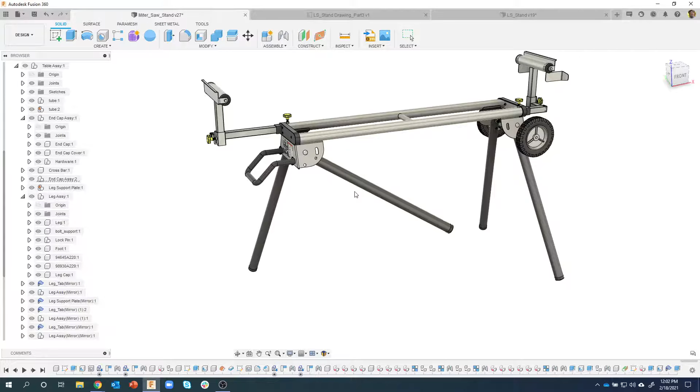We're going to continue today through using the miter saw stand that we've been working on. We're going to be working on this leg assembly, specifically the whole leg. If I zoom up in here, you'll see we've got some hardware - a pin that goes through here with a spring, etc. And then we're also going to work on this slot. The last live stream on this series, we created this sheet metal part, but we left out this slot, so we're going to show you some cool tips and tricks on how to do that.

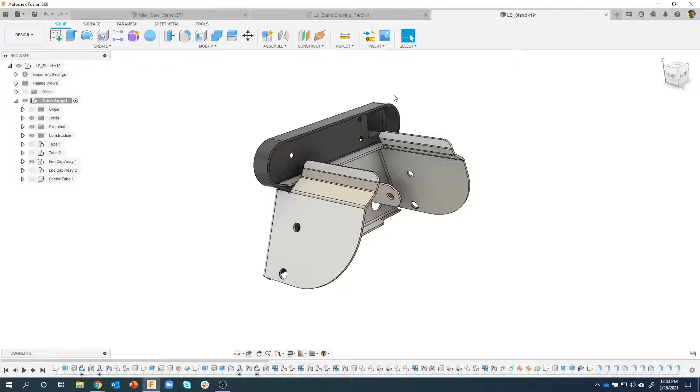We're going to basically be creating one of the legs, and then we're going to reuse that leg around the rest of the design. So I'm going to start out by creating a new component. I've shown in the past you can come into the assemble menu and say new component, or click on this icon and say new component. But my favorite thing to do is to right mouse click in my structure browser where I want that component to be. So I want it to be underneath this table assembly, so I'm going to right click and say new component.

You can't really see what's going on, but this parent says one selected, so it knows that the table assembly is going to be the parent, and this component is going to go underneath that. So I'm just going to call it leg. Pretty unoriginal. Okay.

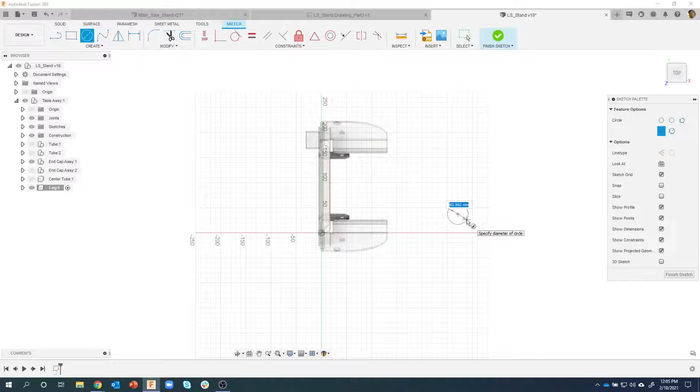We'll create a sketch. In this design, I'm actually creating things out in space and then positioning them into the correct location later. So I just created a new sketch on the top plane. I'll create a circle out here somewhere - doesn't really matter where - and let's just do 45 millimeters. Again, this is according to the drawing.

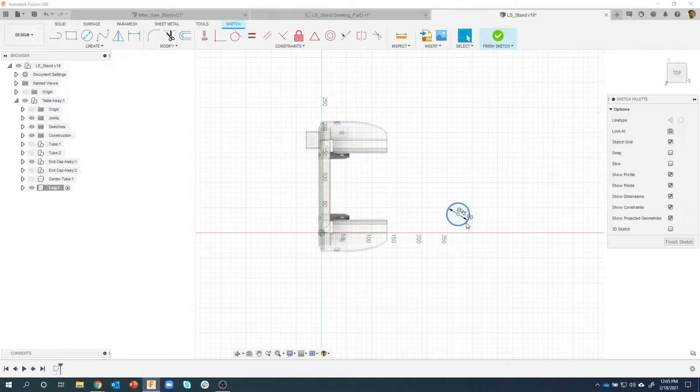Okay, so it's a 45 millimeter diameter. Then I'm just going to extrude this, and I've shown this tip before - I could say finish sketch, but if I just click on my profile and right mouse click, I'm going to do this first extrude. The second extrude is a surface extrude, so you typically don't want to do that. So I'm going to do this first extrude, and you'll notice it finishes my sketch for me, so I don't have to click on finish sketch and then click on extrude. And we'll go minus 820 millimeters according to the drawing.

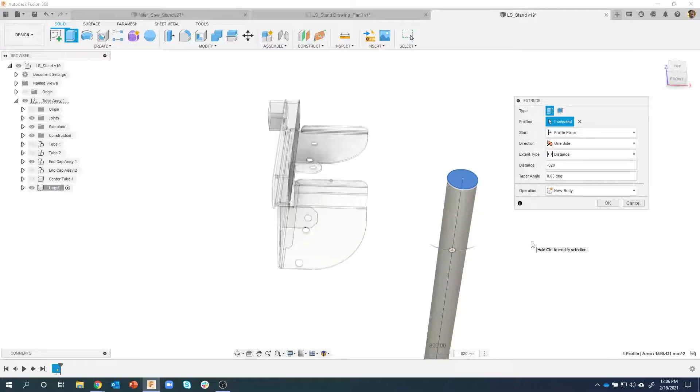Now, we recently added this thin extrude, which I really like. So instead of having to shell this part out or create multiple circles in my profile, I can come in here and say I want to do a thin extrude, and it's going to ask for the wall thickness. In this case, we're going to do 2 millimeters. And when I say OK, it's like it shelled it out for me automatically, and I didn't have to select the top face and the bottom face if I had used the shell command. Cool little tip.

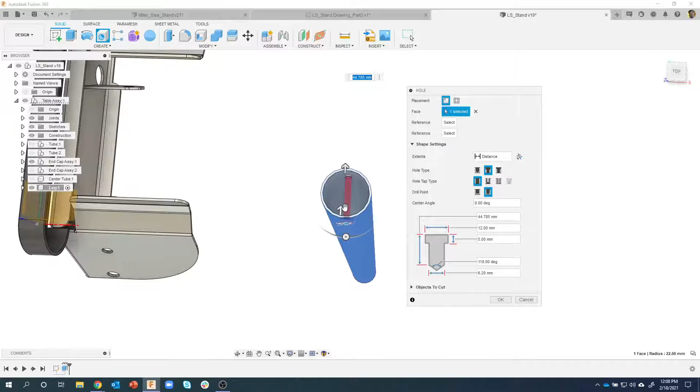Now if I were to have clicked off to the side a little bit more, over here, you'll see it's going to go tangential 90 degrees from that direction. So I don't even have to create an offset plane or anything like that. It just does it automatically, which I think is pretty cool.

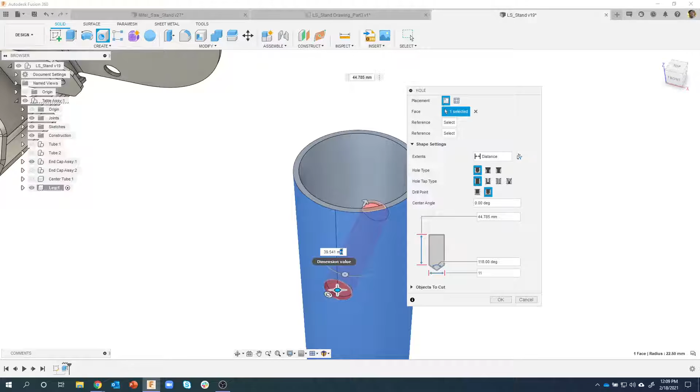Okay, so I'm going to click somewhere on that face. The diameter of this top hole is going to be 11 millimeters. I'm going to reference this top face, and as I hover over it, it highlights. I'll click on that, and it throws a dimension there, basically saying the center of this hole is going to be this distance from that top face. I want it to be 15 millimeters, so I'll type in 15, and you'll see that updates and moves that hole to be 15 millimeters from the top face.

The other thing I want to do is, instead of a distance, say go through all. Did you see that change ever so slightly? Notice when distance was set, it wants to do an angled drill—let me look at it from the side. It just picked some random distance. But if I say go through all, it goes all the way through. The drill point really doesn't matter in this case. I'll go ahead and say OK.

Okay, I'm going to create the other hole. That was the 11 millimeter diameter hole. Now I'm going to do this 12 diameter and 6.2 diameter hole, all with the same command. I'll just right click and drag straight up to repeat my last command. If I right mouse click, you'll see this black line—that's called a gesture. If I right click and drag up, it repeats the last command, which in this case was the hole command. If it was an extrude, it would repeat the extrude command, or a circle command, whatever your last command was.

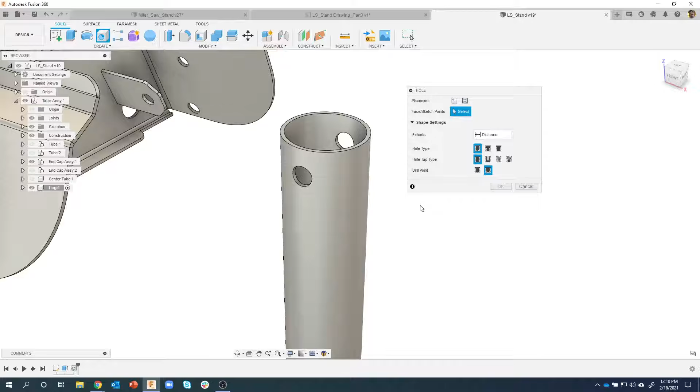Okay, so I'm going to click on this face again somewhere. I'll reference that top face, and this needs to be 71 millimeters down, so we can see that preview. Now, what I want to do is have a larger hole in the front and a smaller hole in the back for this little spring pin to go through.

I could do this with two separate hole commands, or I could change to this counterbore, which will allow me to give a diameter here and a diameter here. For the through hole, I want that to be 6.2 millimeters, and you can see how the preview updated—that got smaller. And let me go here: this one is going to be 12, so that was actually correct.

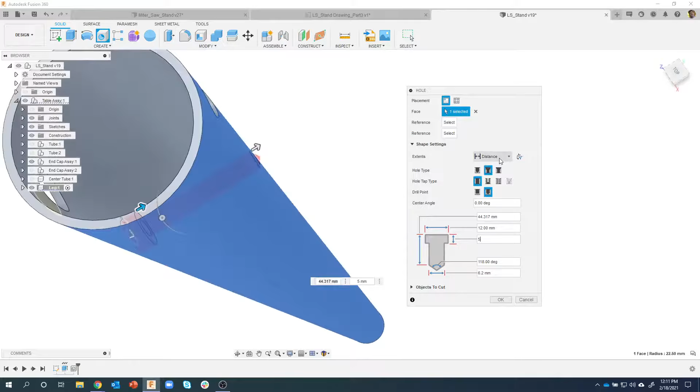And then for the depth, I just need to make sure I'm going deep enough that it's cutting through the wall. You can see right here it's set to 5. I could set it to anything really, it doesn't matter—I just want to make sure it's cutting through that wall. Once again, I'm going to say go through all, that way it goes all the way through.

It kind of rotates funny because that's such a long part. But now you can see we're going to have a larger hole here and a smaller hole through the back. So I'm going to go ahead and say OK, and there we go.

Okay, so Ayal asked a question: can you ask Brad to show what does the rotation handle on that hole do?

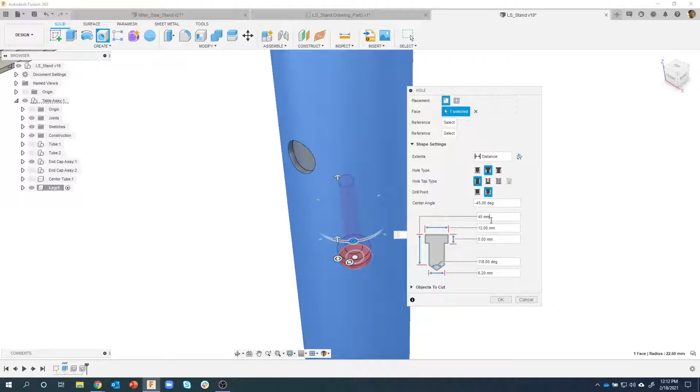So the question was, if I were to create a hole here, it's kind of hard to see, it's kind of buried in here right now, but this actually allows you to—by default it starts at that tangential face, or zero degrees of angularity. I could come in here and rotate it to whatever I want. In fact, I could say I want that to be at 45 degrees—sorry, that was the wrong one—45 degrees right here. So yeah, great question, thanks for asking that.

Okay, moving forward. So I now kind of have the pipe the way it's supposed to look. But in the actual pipe, there is an insert that the bolt goes through. So I'm going to create a new component under the leg.

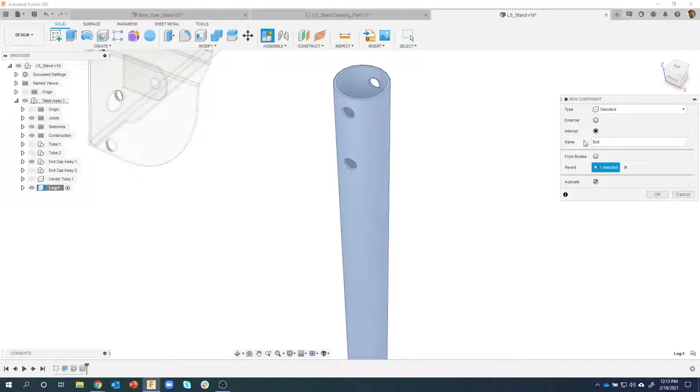Now, you'll notice here we created this leg under the table assembly. You're going to notice I'm going to create some stuff under the leg because it's kind of all together. So I'm going to right click here, new component, and I'm going to call this bolt support, and I now have a new component underneath the leg called bolt support. This will just help with organization.

So what I want to do is basically create a circular insert that's going to go right here. Now I don't have a flat face that I could create a sketch on or anything like that, so here's a neat tip for this.

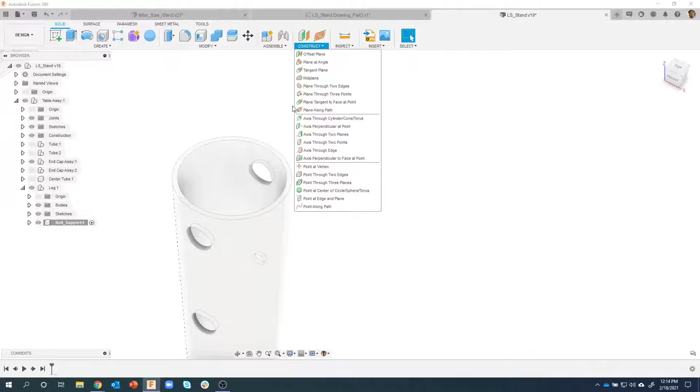I'm going to create a plane at an angle. Well, I don't want the plane on the outside here, I kind of want it through the center of my pipe. So I'm going to do an axis through a cylinder, cone, or torus. What's the face? I'm just going to click on this face, and you'll see that it created an axis that goes right down through the center of that pipe. I'll go ahead and say OK.

Now you'll notice my axis is kind of long, and just like with a construction plane, if you get near the end, you can actually drag these points and make that axis line whatever length you want it to be.

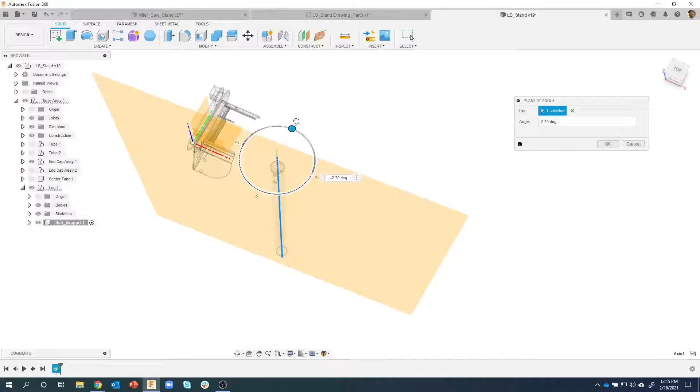Okay, then I'll come in and say I want to create a plane at an angle. Now you'll notice that I'm just going to click on this axis, and it's going to put a plane through that angle, or through that axis point. I can also, just like in the hole command, come in here and rotate this and put this plane at any angle that I want. But in this case, I'm going to leave it default to 0.

And just like the axis line, I could grab the corners of these, because I really don't need the plane to be gigantic or whatever. So now I have a plane that slices through the center of that pipe.

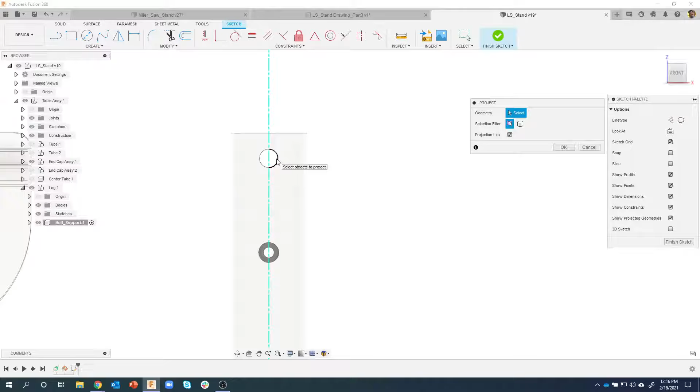Okay, now I can create a sketch. We'll go ahead and zoom up on this sketch. And I want to project, so P for project. I want to project this cylinder. You'll notice I could come and click on these edges, but it's kind of split in half, for example. But if I hover over the cylinder, it's going to grab everything, including this hole down here and this hole down here. I'll say OK, and it's going to project that geometry for me.

Okay, now I can use this to create a circle. However, you'll notice that a center point doesn't show up because this isn't really a true circle—it's on a curved surface. But you'll see these blue snap guides appear. You can see it found one for the horizontal. Now if I just hover over this point, it's going to find one for the vertical. And you'll see if I get near the center, it's now going to snap to that one and this one, and I now know that's my center point. So kind of a neat little tip there using snap guides.

Okay, and I want to make this a 12 diameter circle.

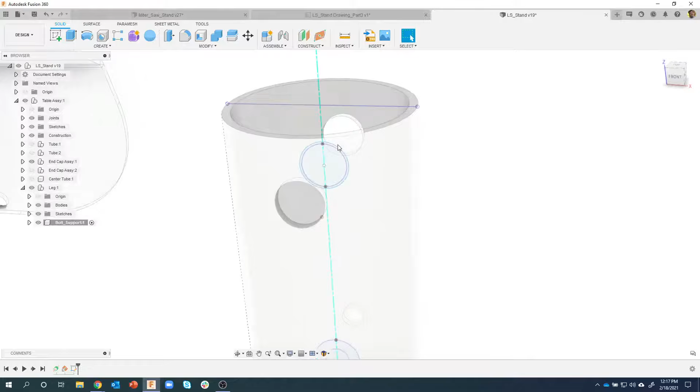And I'll finish my sketch. Now I'm going to extrude both of these features, profiles I should say. And I'm going to say extrude. I like to start to drag to kind of see what that's going to look like.

Instead of a distance, we're going to say to object. And I'm going to click on that face, and you can see that it's going to extrude to that curved inside face. And that's kind of the key right there.

I also want it to be hollow because there's a bolt that's going to go through it. So I'm going to make this a thin extrude, and we'll do a 0.5 for the wall thickness.

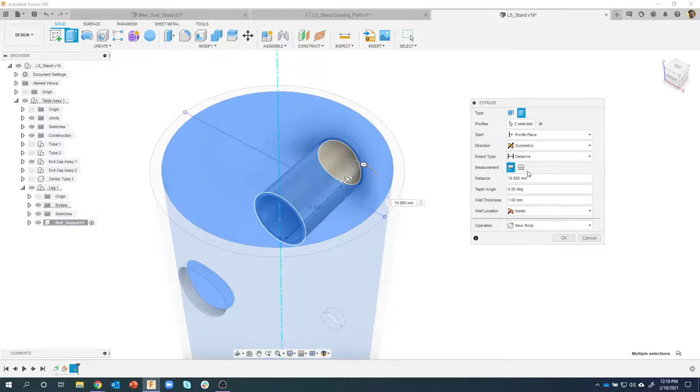Now, I showed this last time. I can't, well, let's try it. Let's do a symmetric. Yeah, you'll notice with symmetric, it says distance and all, so it won't follow that shape, right? It's just basically going in the same distance both directions. So I can't do symmetric.

Let's try two sides. Now this one does say distance, to object, and all. So let's try the to object, and I'll just click on that face and that wrapped around. And then let's change this guy to object, and I'll click on that face, and you'll notice it doesn't really know which side. So this is the reason that I do the method that I do, which is a little bit more steps, 2 more steps.

But I'm going to come in here and just say one side, to object. We do the wall thickness, I'll set that again, 0.5. I'll say OK. And I now get this little insert, and you can see that it's going to fit perfectly. It's lined up perfectly, and this actually gets welded into place.

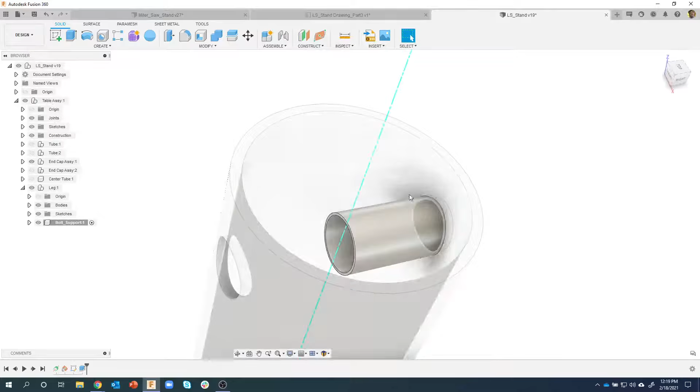And I think it was Ekram made a comment in one of the previous videos: how would you weld that? In my example, it was the nut on top of one of the pipes or whatever. I'm actually not going to do that in the CAD system. When we get to the drawing set, we're actually going to use welding symbols, and we're going to tell the manufacturer that this needs to be welded. So instead of me creating a bead around here, I mean, I could, but there's no need to, because the drawing is going to define how this thing is going to get manufactured.

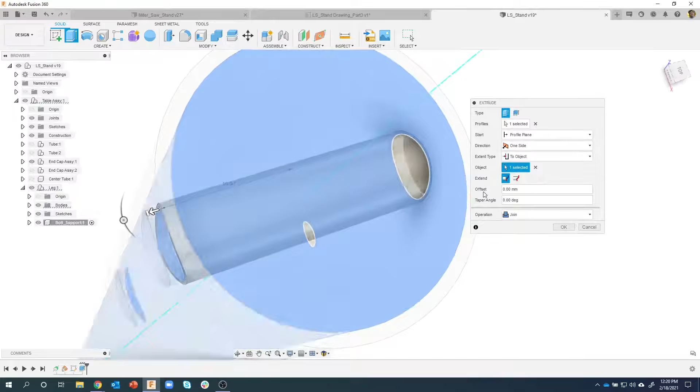Okay, so to get the other side of this, now I'm just going to click on this face and say extrude. And instead of distance, I'll say to object. And you'll see that it will extrude to the other side, and it's all one piece because we're joining it together. So yes, it's a 2-step extrude to get that piece made, but it'll follow this shape.

Now, there's multiple different ways we could do this. I could have done a long extrude and then used the pipe to subtract that out, but then I'd have to remove the extra parts that were created. But there are different methods that you could create this exact same part. So I'm not saying the way I'm doing it is the perfect way or the exact way, it's just one of the ways.

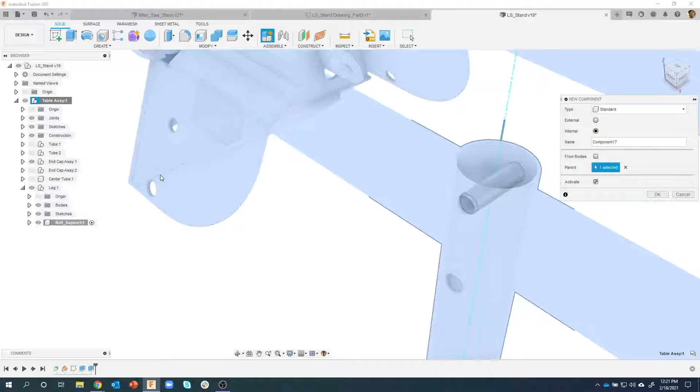Moving on here, so we now have that bolt support done. The next thing I want to do is create the pin that's going to go through here. I'm calling it the lock pin because it's going to lock the leg into place through this hole right here. So once again, I'll right click on table assembly, and I'm going to create a new component. Now you'll notice I'm putting it under table assembly instead of under the leg, and I'm doing this on purpose because we're going to reorganize some stuff, and I want to show you, I get the question a lot, like what happens if I put it in the wrong spot? So I'm just showing you, I can put it here. I'll say new component, let's call this lock pin.

And you'll see it created a new component called lock pin, and it's a pretty simple shape. If I zoom out here and go to the lock pin, it kind of looks like a cylinder and another cylinder with a little groove cut into it. That's what the final thing is going to look like. Now you'll notice on this radius, I call out this tangency weight of 2. We're going to see that here in just a minute.

Here's a detail of this little area right here. So we're going to be creating this part called the lock pin. I'm going to start with simple shapes.

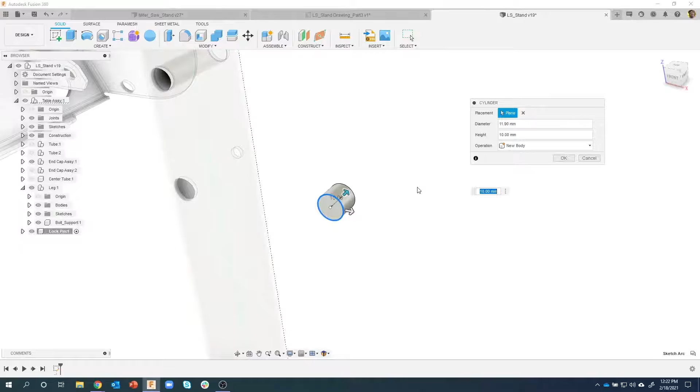I could create a sketch, but instead I'm going to just use a cylinder primitive because that's kind of the shape that it is. I'm going to pick this front plane because it's kind of in the correct orientation, click on it, and draw it out in space somewhere. Let's make this 11.9 in diameter and 10 millimeters in height. You can see right there, 11.9 by 10.

I'll say OK, and now I'm going to create the smaller part of it. I can come over here to cylinder, or right click and drag straight up, and it's going to repeat the cylinder command for me. I'll pick there, and the diameter for this is 6. For the height, I can drag to visually see what that's going to look like, or type in 45 for the height. So that's kind of the basic shape, and this is all one body.

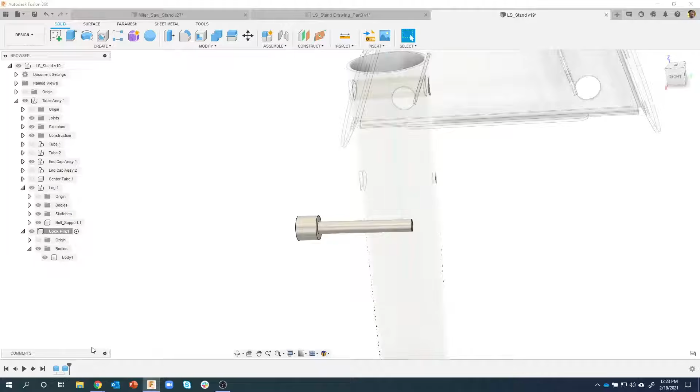Right? It created one because the other one was touching it, it joined it together. We can see that right here.

I could have created a sketch, drawn a side profile, and done a revolve, totally could have done that. Could have drawn a sketch, did an extrude, created another sketch, done another extrude, totally could have done that. Multiple different ways of doing this, but I think the primitives are pretty fast.

Okay, so the next thing I want to do is create that fillet on the end, and this is pretty cool. I'm going to right click on that edge and say fillet, and I'm just going to do a standard fillet. Let's think, it's 3.5 according to the drawing, and you'll see that it rounds over that edge.

But you'll also see right here we have this tangency weight. Watch what happens when I type in 2. Okay? It's a little bit flatter, and then it starts to do the fillet. Let's go back to 1 so you can kind of see what it originally looked like. So it's more of a curve.

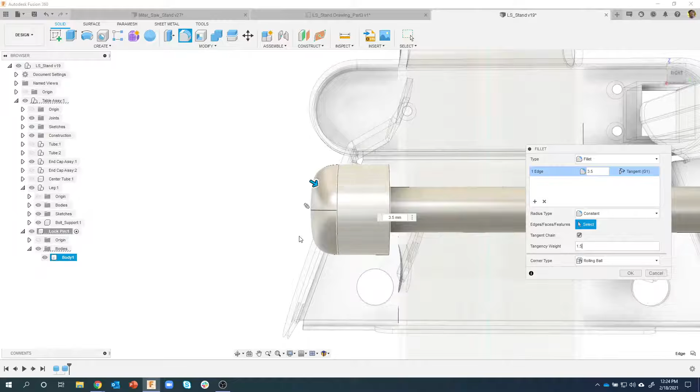So this tangency weight allows you to control how soon this fillet really happens. There's 1.5, there's 2, so you can kind of see as I'm going through here the differences I'm going to get. Let's try 0.5 for example, and you can kind of see how it starts to curve really, really fast. Versus 1, we get a nice transition.

So that's what this tangency weight does for you. I'm going to make it 2, and it kind of makes the front of it a little bit flatter, but it still has a curved edge on it.

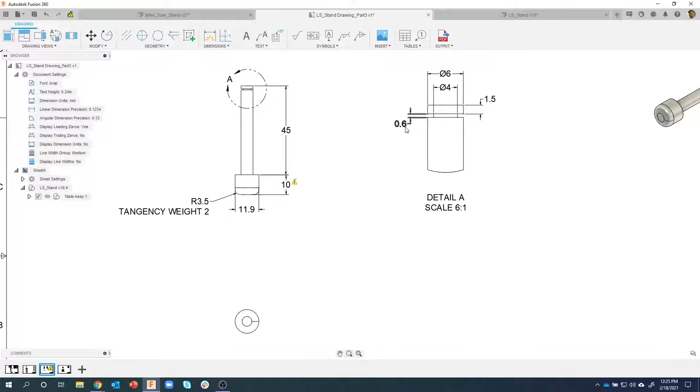Okay, now I want to create this groove. Some of you might be like, well, okay, you could do a revolve. We draw like a rectangular profile and revolve that around. Again, multiple different ways of doing this. What I'm going to do is create a sketch on this face.

Draw a circle, so C for circle, and I'm going to draw that inside diameter. Let me... I didn't even put that in my... here we go. I'm going to put that... Actually, you know what, I lied.

I'm going to back up a little bit. I'm going to put this part in the correct location first, and then I'm going to do that groove. I'll show you why here in a little bit. It really doesn't matter, but I think it's more visual to see where it's going to go.

So I created the fillet on there. Now I'm going to position it where I want this to go. Pay close attention here because you're going to see some interesting tips and tricks on how I could position this guy. I'm going to come in here and say joint. Now, which one do I want to move? This part. And where do I want to move it to? That's how I remember. I want to move it to this part over here.

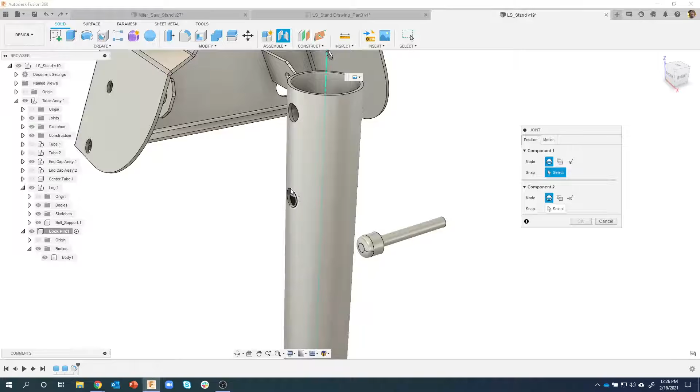But this is like a curved surface. That's going to be a little bit difficult. Well, I kind of want the middle of this head to be kind of in the middle of the hole right here.

So check this out. I'm going to hover over the cylindrical face, and you'll notice it gives me a start, a middle, and an end. In fact, if I kind of look at it from the side, it'll make more sense. It's kind of hard to see, but there's my start, there's my middle, and there's the end. Okay, so I'm going to grab this middle.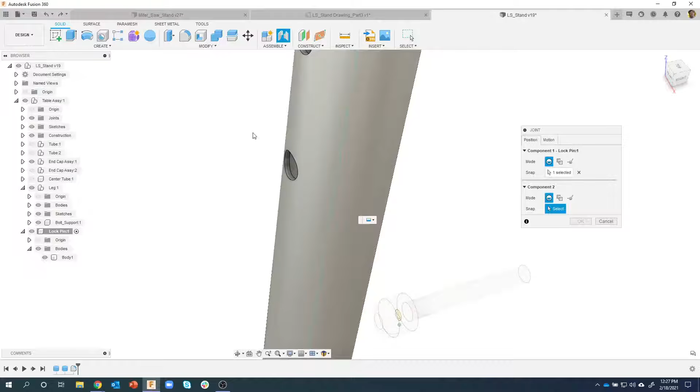So I just grab the middle of this cylinder right here, then zoom up on this hole. You'll notice as I get near this edge, this is not where I want the pin to be. None of these locations are correct.

But if I hover over the circular face, you'll notice it has a start, a middle, and an end. You can think of this as the outside edge, this one as the inside edge, and this middle one as right in the middle. So I'm going to click there, and it brought the middle of this cylinder into the middle of that hole. It's perfectly centered.

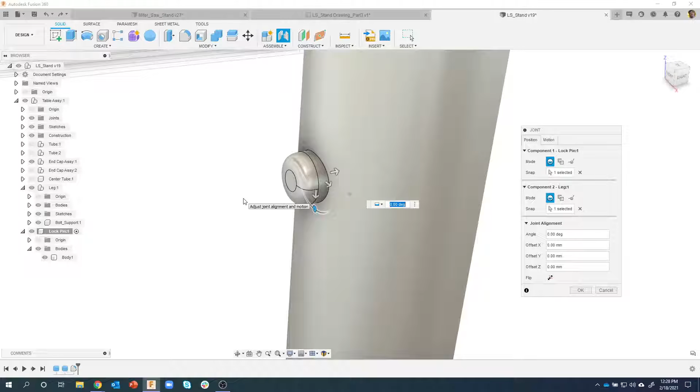Hopefully that makes sense, I'm just showing those joint origins. It really gives you a lot of control where you can say go from the center of something to the center of something else. If you need to, rewatch that part of the video.

Pretty powerful. Now I'm going to change this into a slider because this pin kind of pushes into the pipe. I'll go ahead and say OK. And I now have that pin where I want it to be. Here's kind of why I decided to wait to do the groove afterwards, so you can see what that's going to look like.

Okay, the next thing we're going to do is create that sketch. My lock pin is still my active component. I'll create a sketch, we'll do a small circle here, 4 millimeters in diameter, and then I'm going to say I'm done.

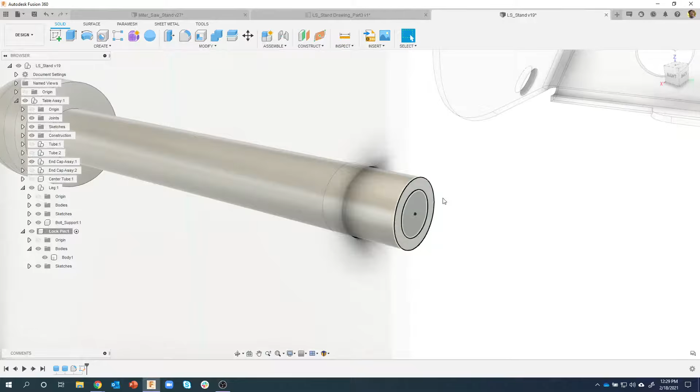Now you're like, well, that profile's on the wrong face, it's in the wrong location. Well, check this out. I'm going to grab that profile, I'll say extrude, and if I start to go like this, sure enough, it's going to use that profile and cut that geometry away.

But I want it to start in a different location, and that's where this start is right here. So I'll change that from profile plane to offset, and now I can specify the offset, which is 1.5 millimeters. Now you can see it's taking this profile, moving it 1.5 millimeters, and then doing the extrude cut. In this case, it needs to be minus 0.6 in thickness.

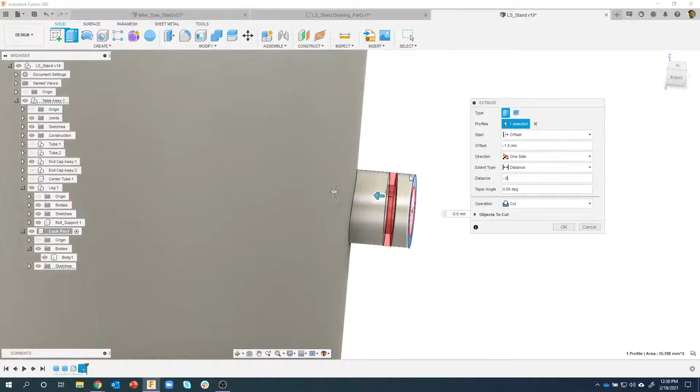Hopefully you can see what I did there. I left the profile on this face, and then we just told the extrude to start in a different location and extrude the correct depth. I find this a little bit easier than having to create an axis, then create a plane through that axis, then draw a rectangle, dimension it to the correct location, and then revolve cut around. That would take more steps than just one, more like two, I should say. The profile and the extrude, basically 2 steps.

Again, multiple different ways of doing this, but I like this method. Okay, so I now have my pin. We've got this little groove for a C-clip to kind of hold this thing into place. I want to put a washer on here. So let's see.

I want to make sure I activate my leg assembly. Okay, then I'm going to insert a McMaster-Carr component. So instead of me drawing a washer or whatever, I'm going to let McMaster-Carr do the work for me.

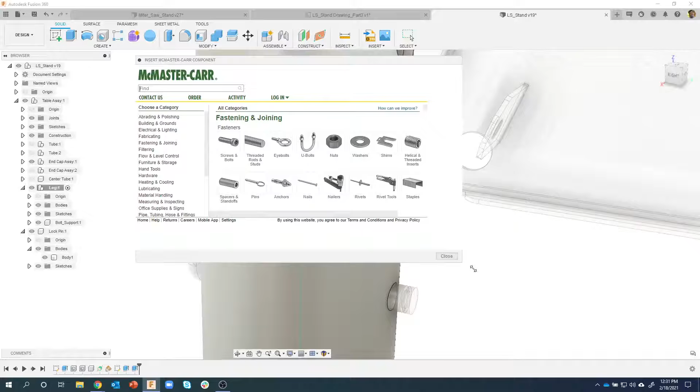In the outline and in the drawing, I have the part number. You could come in here and go to washers and filter through all of this, but I like to type in the McMaster-Carr number. So I'm going to do 98689 alpha and then 115. When I search for that, it's actually going to find that for me automatically. So we can see, if I scroll up, it's a metric general purpose washer, metric 6. You can see it right here, stainless steel, blah blah blah.

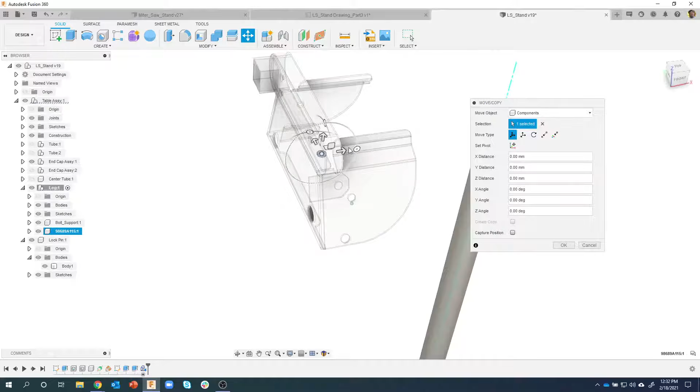So by searching for that number, it brought me right here, and I can click on product detail. I want the CAD file, I'm going to do a 3D step file, so I'll just say download. And it's going to bring that into my 000 location, my origin, which is kind of far away from where it needs to be. So I like to position it sort of where it needs to be. It doesn't have to be exact, just kind of in the general area. So I'll go ahead and say OK.

And then I'm going to create a joint. So I'll say joint, and you'll notice it says some components have been moved. Capture the current position or continue in the previous. If I said continue, it would actually move it back to that 0,0,0 point. So I'm going to capture the position here, and it captured where it was, and now I'm creating a joint.

So I'll say maybe like this edge or this edge, it really doesn't matter. And then once again, I'm going to grab the edge of this circle, but you'll notice that would give me a wrong result. I need this little joint origin to be up and down. So let's turn off the lock pin, and let's hover over this face, and now we can see, sure enough, there's the front edge of this hole.

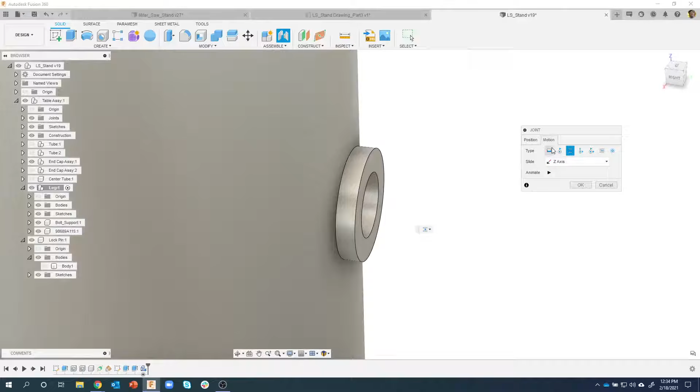So I'm going to click there, and you'll see that it's going to bring the washer. Now it remembers my last motion type was a slider, so I'm going to say rigid. And we can see that that washer is now perfectly flush and centered with that hole because I grabbed that outside origin point of the hole along this edge.

Hopefully that makes sense. Okay, I'll turn the pin back on. So we now have this little washer. The next thing I want to do is bring in that little C-clip. So same thing, I'll insert a McMaster-Carr component.

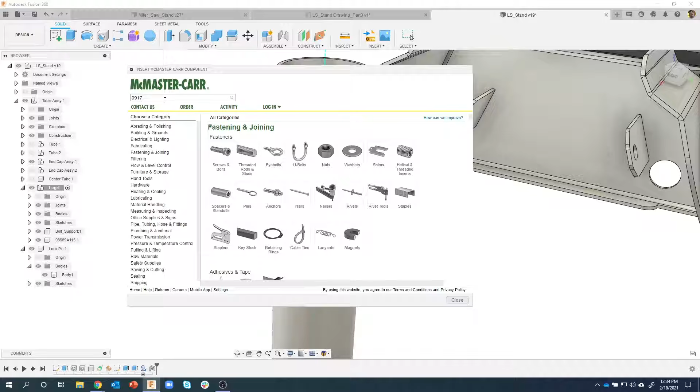Okay. And I'm just going to search for the part number. And in this case, it's 9917, 8 alpha, 101.

And sure enough, it found this. I'll scroll back up so you can kind of see this external retaining ring. I mean, think about how much time that would take for me to model that, to draw that, but it already exists out here, and it's the right size. I'm just going to go ahead and click on that. I'm going to say download.

Now I'm going to show you a neat little tip. Remember last time I said it brought it in at 0,0,0, and I kind of positioned it sort of close to where it needs to go. Okay, but then I said okay. Notice in here there's a capture position. So I could just click on that and say okay, and now it's not going to complain at me when I go to do the joint command. You'll notice it didn't say, you know, parts have been moved, you want to capture or continue. So you can save a step by clicking on that capture position when you insert the McMaster-Carr component.

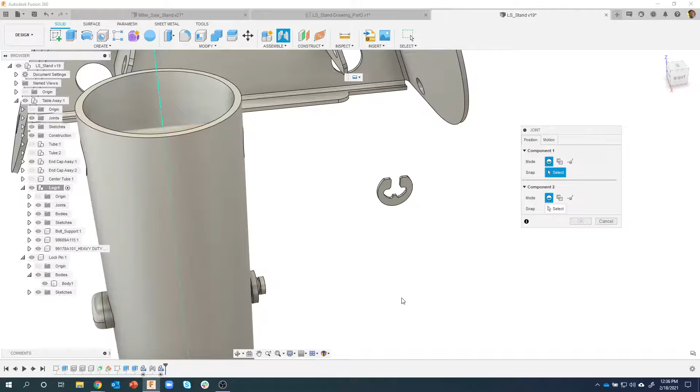Now I want this to be on that little, in that little groove right there. Oh, fast zoom. So I'm going to hover over like this circular shape, you can kind of see there's like a circular shape right here. So I could grab any of these edges, it really doesn't matter, and you can see it's going to create that little origin, that little plus symbol like right there. So I'm going to click on that, and it captured the center of that.

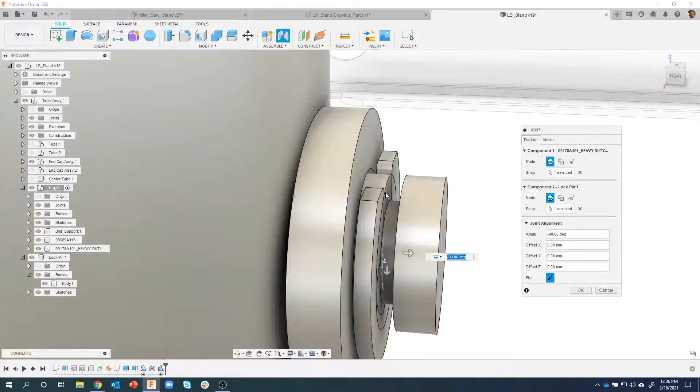And then I'm going to either click on like that edge there, that edge there. It doesn't really matter, honestly. And then it's going to position that clip. Now, as I look at this, it doesn't look all that great. But I can click on this flip, and you'll see that it's going to flip from being on the wrong side to being on the right side.

And to answer Ayal's question about the rotate, you can see the clip is kind of like that. Well, I could now that it's in place, I could come in here and I could rotate this to any direction that I want to make it a little bit more random or something like that. Now, I usually keep them kind of orthographic, so like when I'm doing a drawing or something like that, it makes a little bit more sense, less hidden lines or something like that. But again, it's totally up to you.

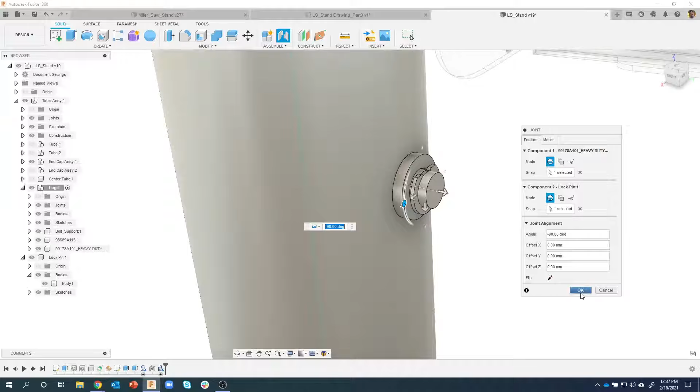For example, if you were to insert a bolt with the bolt head, you could rotate that bolt head around so they're not all pointing in the exact same direction to add a little bit of realism. So, okay. So we'll go ahead and put that clip like so.

Now the last thing we want to do is there's actually a spring in here that's trapped by the inside of the pipe. This allows us to push this little pin in and rotate the leg around. So we need to create a spring.

Now I could grab one from McMaster Carr and bring it in. I could totally do that. But I wanted to show you this coil command.

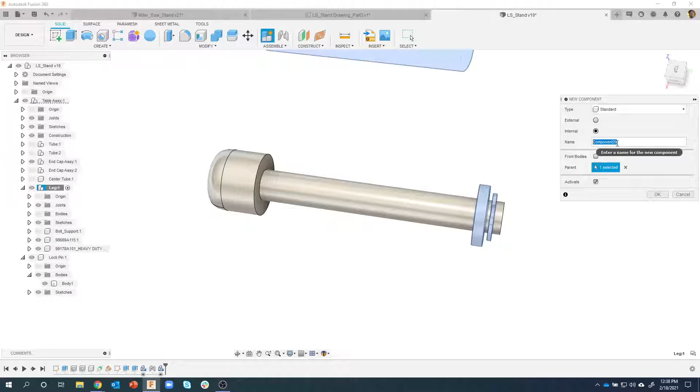So let's turn the leg body off and the bolt support off to simplify things. I'm going to say create coil. Now before I do that, it's going to be a part, so I want to make a new component. I'm going to right click on leg, new component, and call it spring. Now we're in the spring component, and anything I do will get captured in that component.

So I'll say coil, and it says select a plane or planar face. I'm going to click on this face right here. Then it says place a center point, and you'll notice it's actually catching to the center. Let me make it a little bit more isometric. It's catching to the center of this face right here.

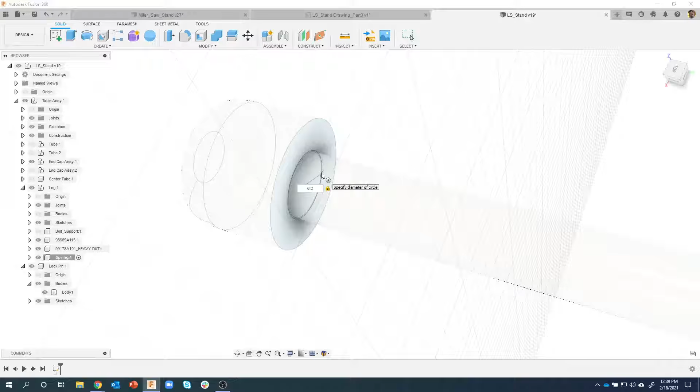Now it's asking for a diameter of the spring, so I'm going to type in 6.2. You'll notice it gives me just a little bit of clearance. I'm going to hit enter, and it gives me a preview of what this is going to look like.

Let me go try and do default here. Usually it'll look something like this or something like that, I think it's like 2 or 3 coils or whatever. And you'll notice that these coils are kind of intersecting with this pin.

Well, the coil command has a lot of options in here. I'm not going to spend too much time, but you can see revolution and height, so how many revolutions and how tall is the spring. I can go revolution and pitch, height and pitch, or I can do a 2-dimensional spiral. Okay, I'm going to leave it revolution and height.

How many revolutions? Well, I want it to be, in this case, let's do about 10 revolutions. And you'll notice I get an error message, failed to build. Well, that's because of the height. In fact, watch what happens when I start to drag - as soon as it can get 10 coils in there, it will. But they can't be overlapping, so if our height isn't tall enough, they would overlap, they would intersect. That's not good. So if you ever get that error message, just keep filling out stuff.

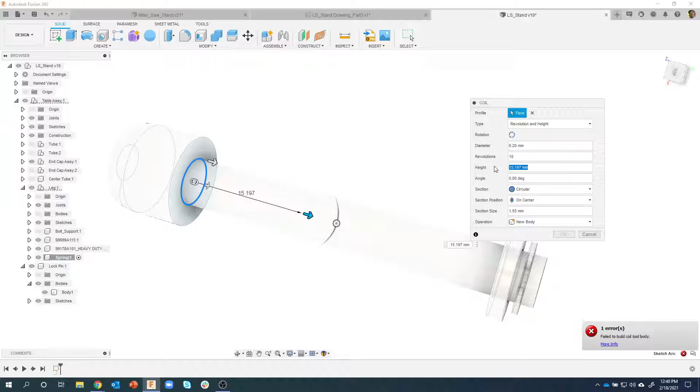So I'm going to say 38 in this case. And there we go.

And then you'll notice it says section is circular. We could do square, you can do different shapes, but obviously in this case I'm going to do circular. And then this section position, it says on center. Well, I'm going to say outside, so it's going to put the coil so it wraps around this diameter right here, the 6.2 diameter.

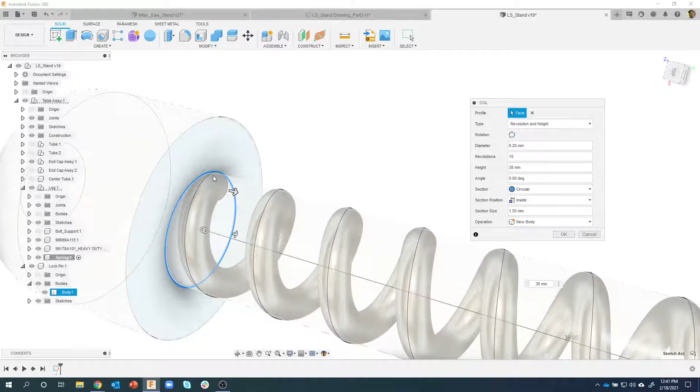Or I could come in here and say on the inside, and it's going to be on the inside. You can kind of see how it's following this blue circle. It's on the inside of that blue circle, it's on the center of that blue circle, or it's on the outside of that blue circle. And that's what I want.

So 10 revolutions, height of 38. I'll go ahead and say okay.

Now the drawback with this is we started it on this face, and so you can see that it's kind of self-intersecting, that point right there. So I'm going to right click on the spring and just say move, and let's translate it to the right. So you can see we can slide it along this pin.

Let's just move it to the right, maybe about 1 millimeter or so. Let's just see if that looks good. Yep, that gives me some clearance there, gives me some clearance there. I could even do maybe like 1.5 - nope, too far. So whatever works, 1.2, 1, I don't care.

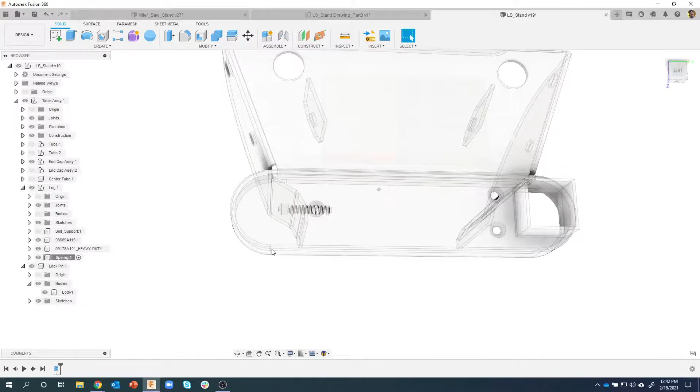And let's go ahead and capture that position. Okay, so zoom back out. Let's turn our bodies back on. We now have this leg with the pin, the spring, the washer, and the clip that's going to kind of hold all of that together.

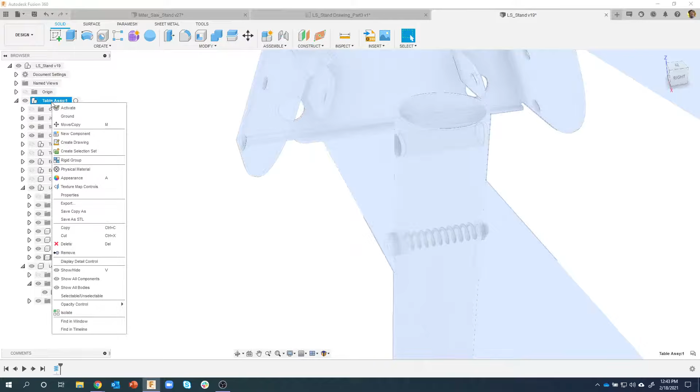So under the table assembly, I'm going to create a new component and call it pin assembly. Now I'm going to drag the lock pin, the spring, and these two washers and clips into my pin assembly. I'm just grabbing those, and you can see this little blue bar appear every once in a while. I'm going to drop it on top of pin assembly. Now we can see that this is all one sub-assembly, not one component.

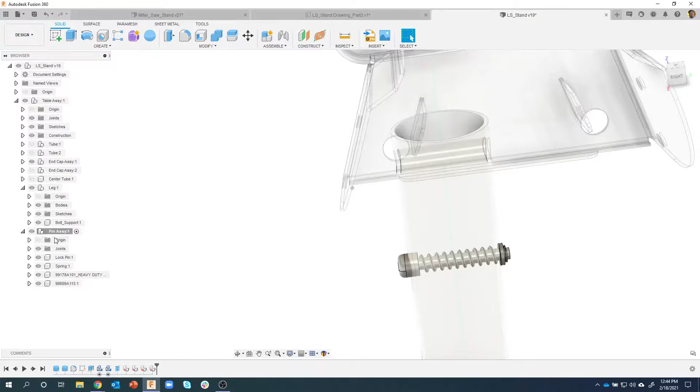It's an assembly with all of our stuff inside of here. So here's my lock pin, here's my spring, here's the clip, and there's the washer. It's a really cool way to organize how things should be together, kind of like sub-assemblies, sub-sub-assemblies, etc.

In fact, I'm going to create another assembly. So new component, let's call it leg assembly. I'm going to put the pin assembly in there. I'm going to put the bolt support in there. And I'm going to put the leg in there.

Now under the leg, if I turn that on or off, you can see everything turns on and off. There's my pin assembly, which you can see like a sub-assembly of it. And then there's that bolt support part, and then there's the actual leg itself. So it's a cool way of organizing things.

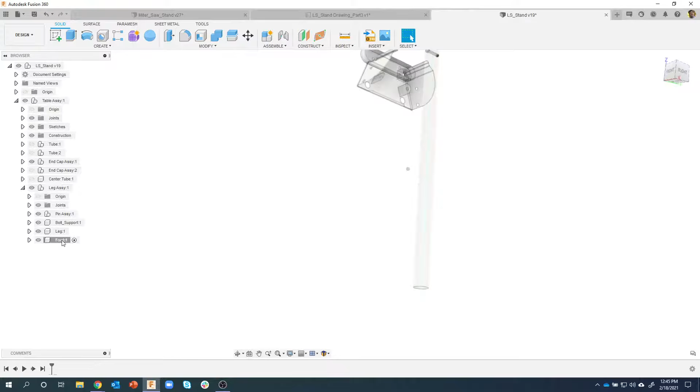So the last thing I want to do is create that foot. I'm going to right mouse click on my leg assembly and say foot. I now created a new component called foot. It's pretty repetitive here, so I'm going to go at a pretty good pace. I'm going to draw it on this top view.

Again using dimensions from the drawing, this is a 40.5 - I'm sorry, I lied, 45 - and it's going to be 20 tall. So we're now looking at the foot. Here's the 45 by 20 tall, that's what we're doing there.

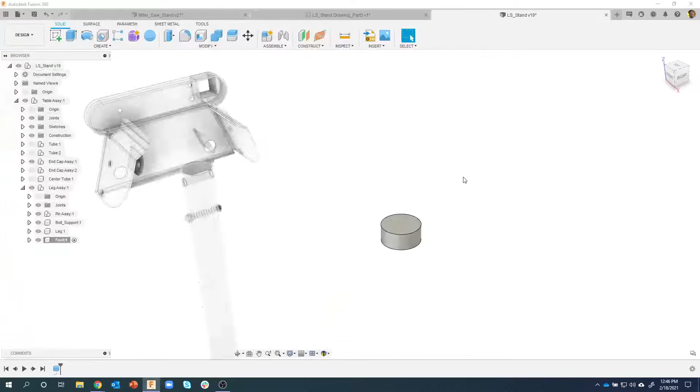I'm going to do the same thing - we did the 45 by 20, now I'm going to do the 40.5 by 27. So I'll zoom up. We'll repeat my cylinder. This is the 40.5 by 27.

So there's the basic shape of the foot. Then I want to create these angles here, and so I'm going to use a chamfer, and you can see it says 15 by 20 degrees and 2 by 75 degrees. So how do we do that?

Well, I'm going to click on this edge, say chamfer, and by default it's set to equal distance, so it's going to be basically a 45-degree chamfer. But if I go under this type, I can say two distances, or distance and angle. So on this bottom one it's supposed to be 15, but the angle, instead of 45, I want it to be shallower, so I'm going to say 20, and you can see how that is now 15 by 20.

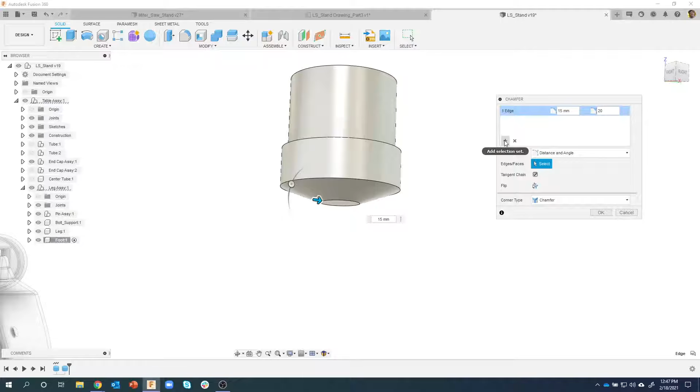And then this is cool - I can add another selection to this, so I'm going to click on that plus. I'll click this top edge, and it knows that it needs to be a distance and an angle, so we'll do, according to the drawing, 2. You can see the preview of what that looks like, but it needs to be steeper, so I'm going to say 75. I'll say OK, and we now have one chamfer feature in the timeline that's actually doing two different size chamfers.

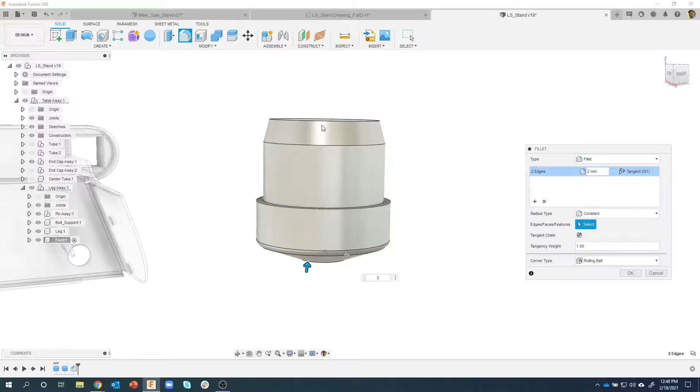I'll fillet these bottom edges. Those are supposed to be 2 millimeters, and this top edge is supposed to be 1 millimeter. So again, just like in the chamfer, I could come in here and say add a new selection. Let's do that guy and make him 1. So you can see we've got two edges at 2, one edge at 1, and the fillets that define the shape of this part are under one fillet feature.

The next thing I want to do is, you can kind of see here, it's got these support ribs on the inside, and it's shelled out. So let's shell this guy out first.

I'm going to click on that top face and say shell. As I start to drag, we can see a preview of what that's going to look like. It's basically shelling out the inside of the part, and the wall thickness is supposed to be 3.5 according to the drawing. So I'll say 3.5, say OK.

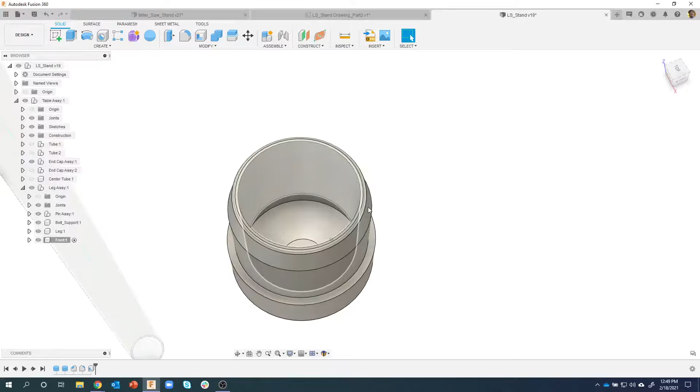Now I want to create those cross member things. I'm going to zoom up a little bit. There's a flat face right here. I'm going to create a sketch.

And then I want to project. P for project. I want to project that flat face right there. And the reason for that is we're going to use the web command, and all the web needs is a couple lines. So I'm going to just draw a couple lines like so, a line like this. I can see that those are horizontal and 90 degrees with each other.

Well, I want these points to be touching that edge. So here's a neat little tip. I could come in here and say coincident, click that point and click that edge, and you'll see that sure enough it jumped over there. And so now that line is coincident with that edge.

Well, instead of actually having to do the constraint, I can just grab the point, get it near that edge, and you'll see a little X show up, and it's going to create that coincident constraint for me automatically. So as I'm dragging, those points are staying touching that edge. If you're comfortable with this, you can just drag these across, and it knows that those are now coincident points. And then the last thing is I want to make sure that they go through this point right here.

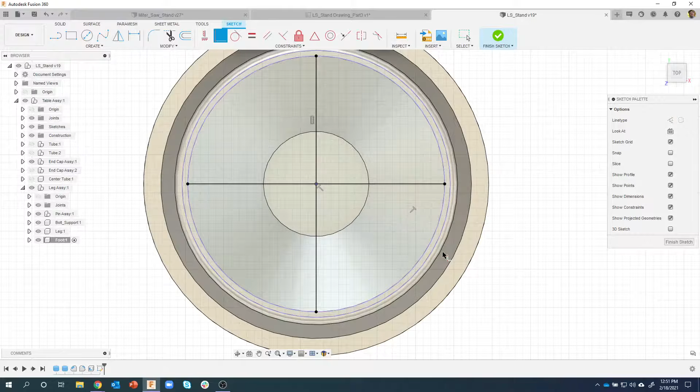That line there and that point right there—we can see that they turn black, which means that they're constrained. I'll finish my sketch. And those lines are perfectly going through the center, and they're touching that edge.

Then I can come in and use the web command. Really powerful command. What are the profiles? I'm going to say that guy. You can see we can change the thickness here. I'll add that edge in there also. And you can see how it's going to actually—it's kind of hard to see, but it's wrapping down underneath that taper right there. It's pretty amazing how this works.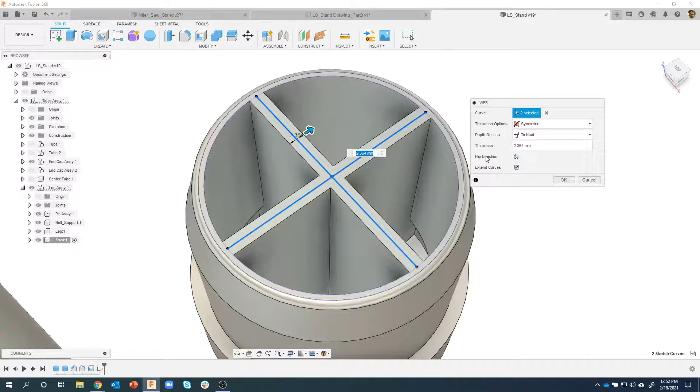Okay, and those are 2.364 millimeters thick. We'll say OK. And we've just created this internal support for the foot.

So the next thing I want to do is there's all these little tiny ribs on the outside, and this basically allows it, when it gets pushed into the leg or the pipe, to create tension on that and hold it in place. So I need to create a profile, and we're going to use the emboss command, but I need to have a sketch to draw on.

And I like to have it kind of near the part. So I'm going to come in here and say offset plane, and I'm going to pick one of these flat faces. It really doesn't matter which one, honestly. I'm just going to pick this guy.

And I'm just going to drag this plane so it's sitting in front of the foot. Again, I don't really care what this distance is. I could come in and say make it exactly 30 millimeters if you wanted to, but you honestly don't have to.

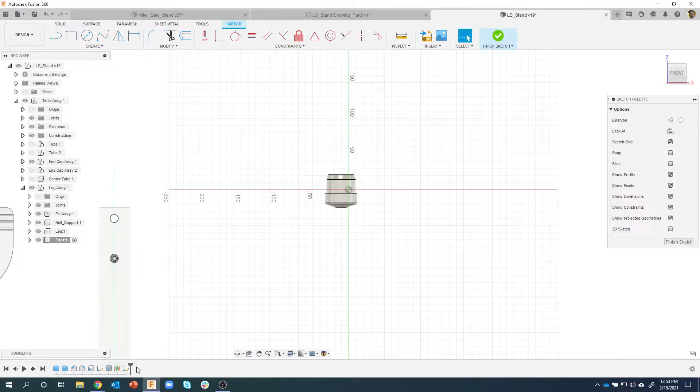So I now have a plane I can create a sketch on. And again, because my foot is active, all of my features in the timeline are underneath this foot. Let's project that face there, because that's where the sketch is really going to go. So I just projected that face—you can see these purple lines.

Then I'm going to create a rectangle, and I'm going to use center rectangle. What this allows me to do is as I get near this line and get kind of near the center, you can see it snap automatically to the midpoint. So I'm going to click there, and you can see that it's going to create a rectangle.

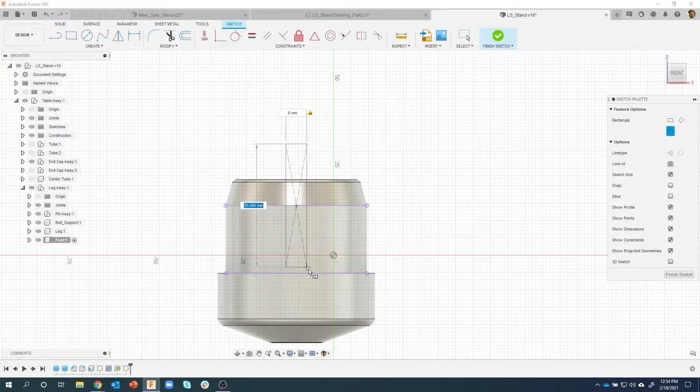I want to catch down here too, but I need to be very specific with the width. So I'll tab to the width and type in 6, then hit tab again to lock that width in. Now no matter where I move my cursor, the width stays locked. All I need to do is come down, and you'll see it snap to that bottom edge, making it coincident.

Now you might be saying that rectangle is way too tall, you only need it to go right through here. And yes, that's correct, but by using the center rectangle it was much faster. I know it's perfectly lined up, and I didn't have to add a whole bunch of dimensions.

You'll notice there's my profile right there. It's because it's being split by that line right there. I don't even care about that profile.

So we'll come in here and say emboss. What's my sketch profile? That guy. What's my face? That one there. By default it's usually a little bit thicker, like so. You can kind of see the preview there.

According to the drawing, the depth is 0.2, so I'll say 0.2 and OK. So we just embossed it so it follows that curve, which is really cool.

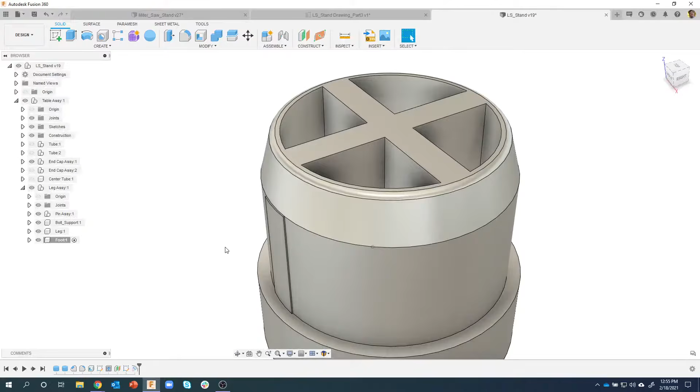But I don't want to have this little sharp edge right here as it's being inserted into the pipe. So check this out, I'll click that edge, say chamfer, and we're going to do that distance and angle again. It actually remembers your previous entries in here.

So I could come in and say I want that to be 0.2, and it remembers that. I could come over here and it remembers all the different degrees we did, so I'll say 75. You can kind of see how it basically joins with this existing chamfer. So another neat tip: if you just click those little down arrows, it remembers your previous entries.

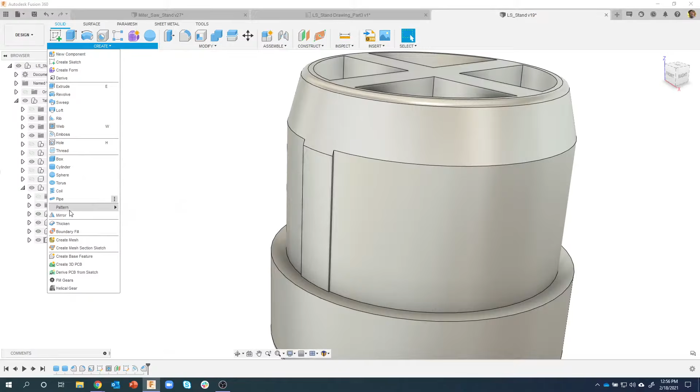Okay, so now I have one of these, and I want it to go all the way around. So we'll say pattern, circular pattern. Sometimes by default it's set to faces. Please don't use faces unless absolutely necessary, because think about how many faces I'd have to select and zoom in on. Instead, I'm going to change it to features.

I want to pattern the emboss feature, and I want to pattern that chamfer feature. So it's going to take this emboss and pattern it around, and it's going to take that little chamfer and pattern it around too. What's my axis? I could click on an edge, I could click on a face, it really doesn't matter honestly. I'll say that—let's do 8 of these. I'll say OK.

And there is our foot. Literally it looks like about maybe 10 features. I could have done this as a revolve, there's many different ways. I could have drawn and extruded down. There's many different ways you could create this.

I'm going to change the appearance of it really quick just to make it a slightly different look and feel, so I'll just do this black textured plastic.

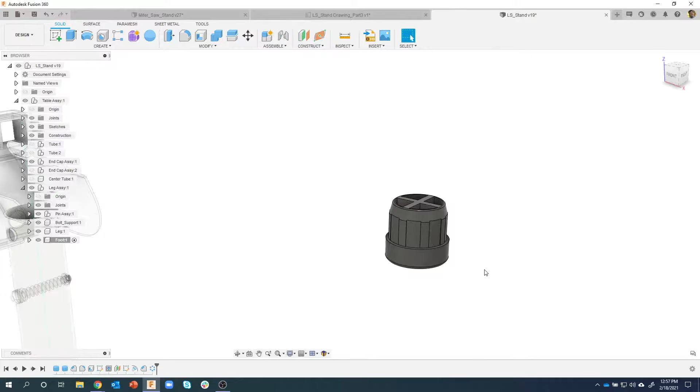The last thing I want to do is put it where it belongs, so I'll say joint. Here's another tip: I like to create the joint at a higher level, so instead of having it show up under the foot, I might put the joint under the leg assembly. You'll notice there's these joints right here, so instead of having them hidden in sub-assemblies, I'm going to activate my leg assembly, create the joint, and say maybe that circular edge with that circular edge, and it will position that foot right where it needs to be.

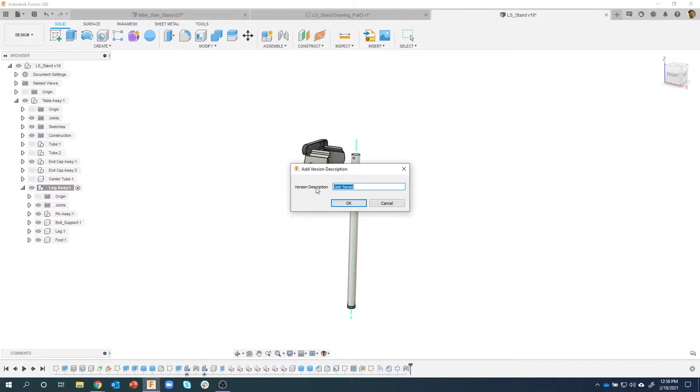I'm going to go ahead and save. I'll call this live stream session 3.